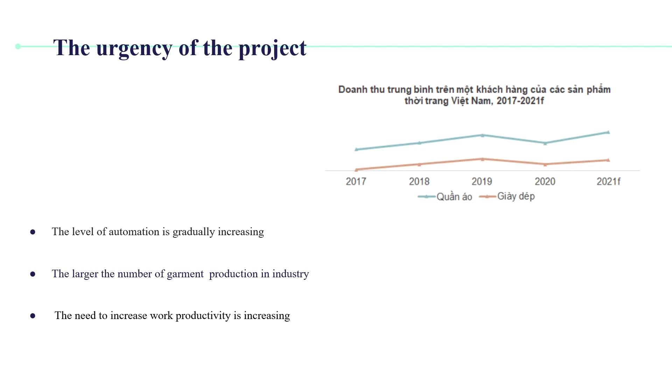Therefore, in order to ship out and sell more products—we'll get to that later—to ship our products, we need to fold them together, right?

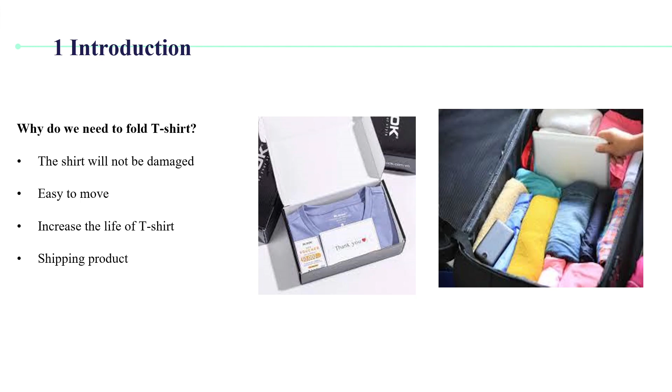That is one of the reasons. Other than that, there are a lot of reasons why you need to fold t-shirts. I don't think my mother told me to fold my clothes for nothing. There's a reason for them, a big reason.

I'm sure you have been seeing these videos a lot. I saw this personally on TikTok first. It was like a life hack, and I think it is fascinating.

You can fold the clothes with just some cardboard and duct tape. It is really useful. Based on this design, based on this principle of folding a t-shirt, we thought to ourselves.

Could we make a machine using this principle? Would it be possible? Do we really need one?

I think that, yeah, we definitely need one because look at the industrial scale. You cannot have like 200 workers just folding clothes. That would be impossible, a waste of manual labor, right?

So you need a t-shirt folding machine, at least for the t-shirt selling industry. That is why we came up with our machine.

You can see here, this is our first pictures. I'm going to talk about it right now, and yes, we are really proud of it.

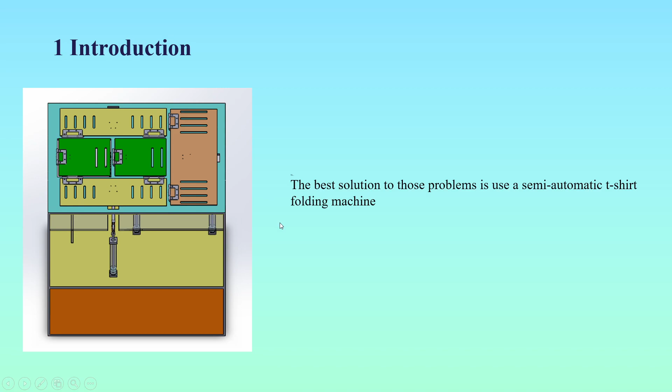Let's talk about the history. Back in the 80s, there have been people, scientists, engineers working on this in Italy.

I'm not going to say their name, I might ruin it. Also, they have not only been able to fold the t-shirt, folding clothes, they have been able to package it too, right? So these things have been developed before the year 2000, before I was born.

So we are not new to this area of research. You could say that we have a lot of, how do we say, former instructors.

Like we have borrowed a lot of ideas from other manufacturers, right?

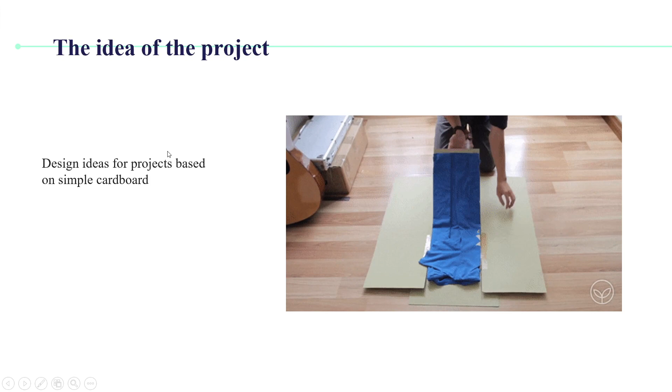So still using these simple cardboard thingy, right? We have designed our own t-shirt folding machine. Okay, this is one of our competitors. I don't think we could say competitor because no way I could beat these guys, right? Yes, but we do beat them in some areas.

Let's talk about this one first. This one is the Mikiyo AT-450, right? This is the one that struck with me the most. I really love this one. It is compact, flexible, and really low on power consumption. The negative aspect of this machine in particular is it is quite slow, and therefore it does not produce enough product in time comparing to the others.

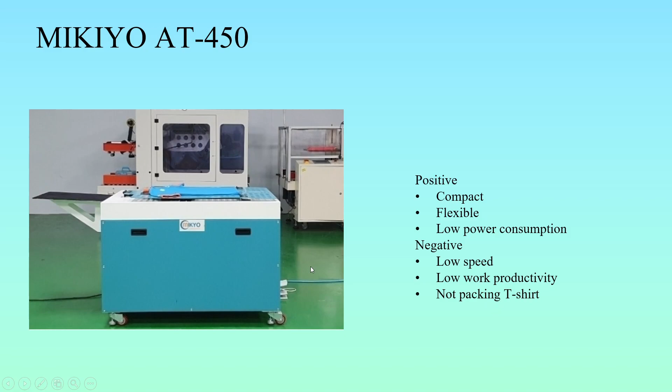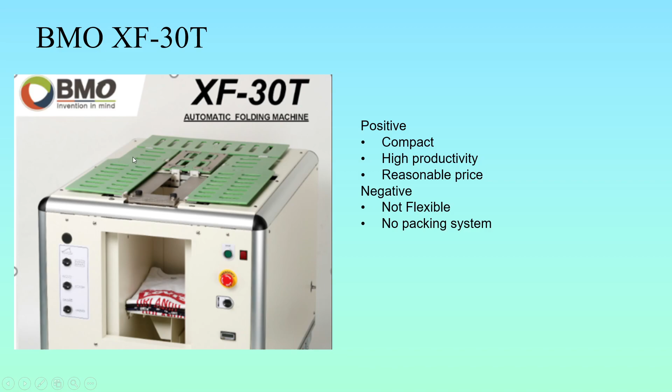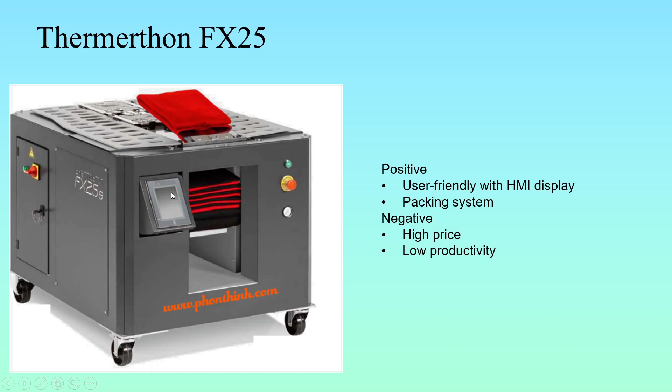Okay, so now we are going to go through the main part of our presentation, the mechanical design. We have borrowed this design, a sort of a table with four sides. We are cutting out these two parts and revealing the motor. Oh no, not the motor, the cylinders and the actuator underneath on how to move these foldable wings.

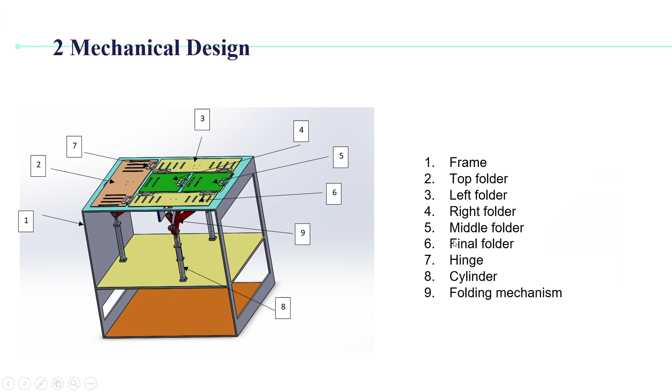Right, so with the 9 parts we have here, we separate them into 3 categories. The frame of the machine, which is just this one. It is really complex because you can see here we cut out a lot of holes so the machine could work without interfering with the frame. Second part is the wings, the main part that is contacting with our products, aka the t-shirt, and the actuator is the driving factor to move our foldable wings.

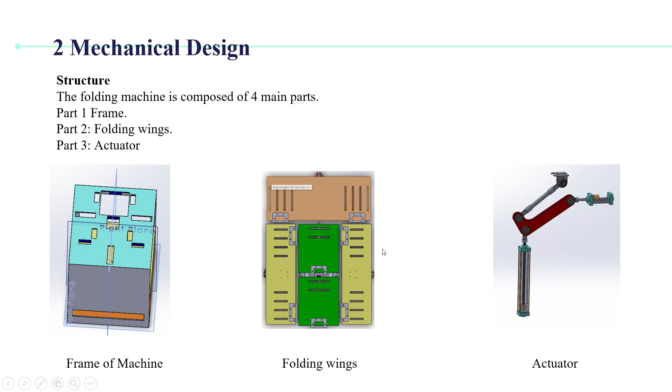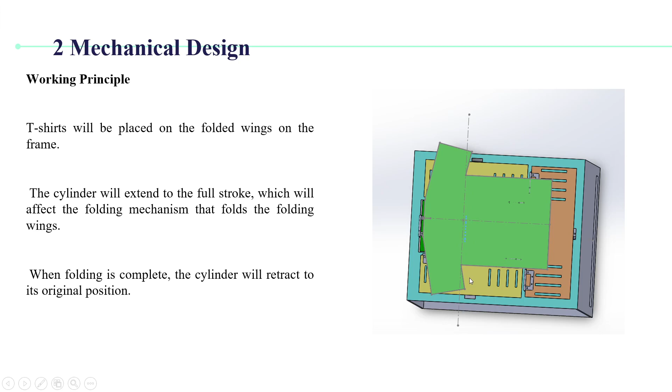Okay, simple, right? So we put on here a demonstration of our t-shirt. As you can see, a worker or anyone, you, me, anyone, will put the t-shirt onto this desktop, and then they would push a button, and this top folder will fold in, the two side folders will fold in, and then the final will fold in, just like this. So easy to understand.

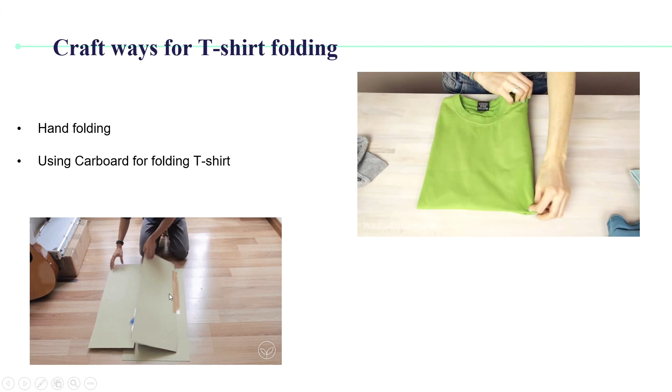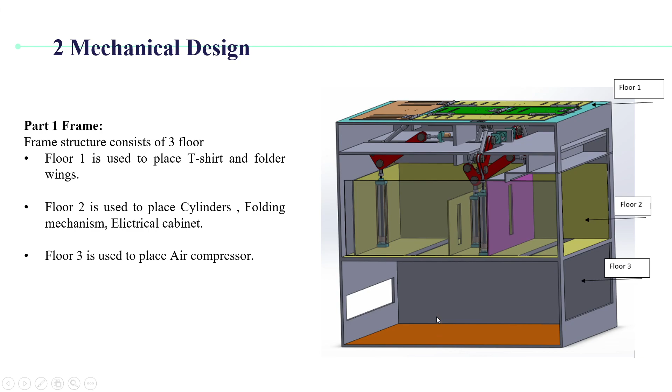So right here we're going to place a, what is that, reservoir, right? And, you know, what is it called, solenoid, to control these pneumatic circuits.

Okay, so let's talk about the folding wings. I have talked about this before. You can see there are 1, 2, 3, 4, 5 folders, of which we designed 3. These two are the same, these two are the same, just placed on the opposite side.

We hold them together using the hinge, which we will talk about later. Now, this is the drawing of our foldable wings. We didn't give the correct dimensions because the machine is meant to be interchangeable. You could replace these folders to fit different types and sizes of t-shirts that you want to fold.

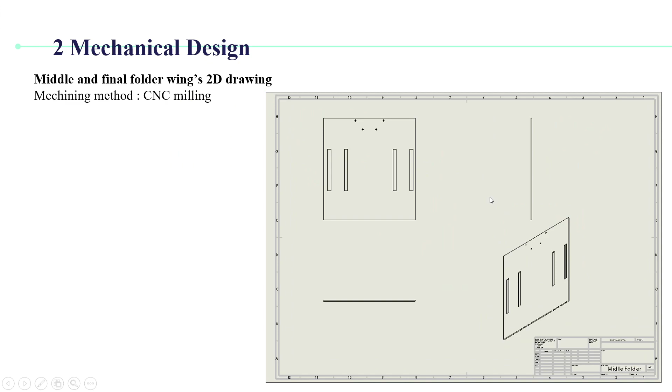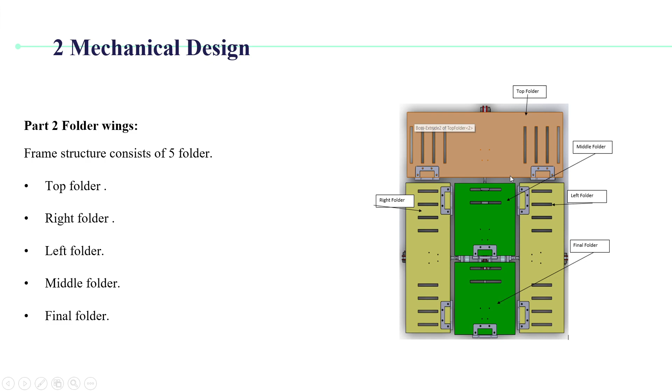Okay, enough about that. Oh, one more thing. The material that we decided to use is plastic, PVC plastic, because it is friendly. It could withstand a lot of forces. Among these plastics, it is also very safe for human contact.

About the hinge, we are using the torsion hinge, which has this design right here. At first we wanted to use the butt hinge, but we ran into some problems because there is a lot of torsion going on when you fold using the actuator that we designed. So we swapped it out using this hinge.

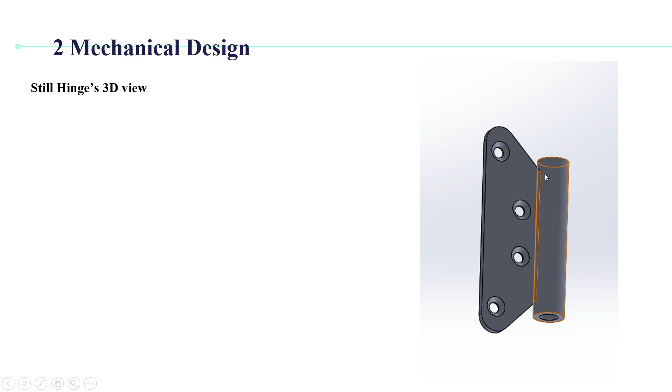There are 3 parts of it. This right here is the moving hinge, the part that will be moving. This is the first part, and this is the drawing for it. This is the still hinge. This part will stick into the frame of the machine and stay there to stabilize the folding mechanism. This is its drawing, and combining it all together, we will have this whole product.

This right here is the shaft holding it, and this right here is the roller — no, not this one, right here.

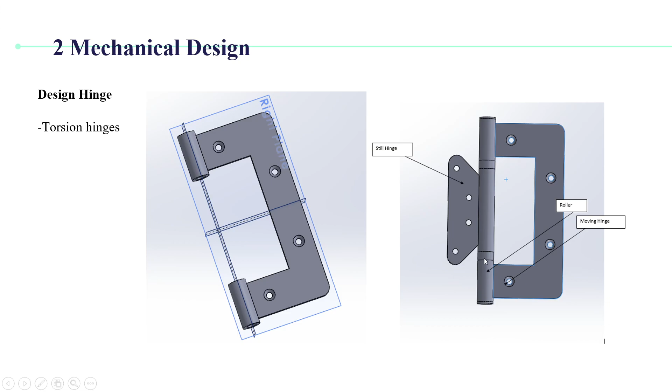So now to our most anticipated part, we go to the actuator. Like if you remember, we've asked a lot about how to transport this motion of moving a cylinder up and down into a turning of the folding movement of the folder.

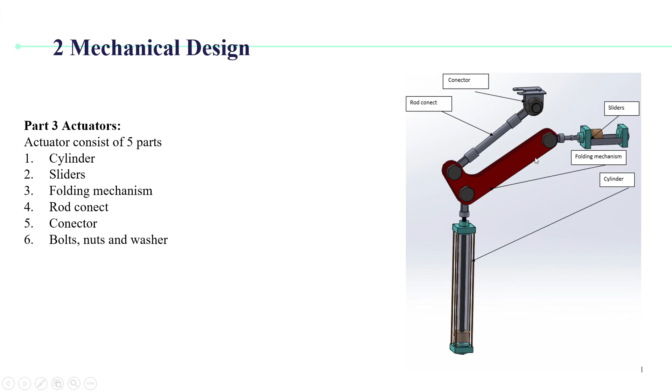So this is our design. This is our cylinder. It will go up and down being controlled by the pneumatics mechanism. And here we have a slider which will move in and out. I'm going to show you this one so it is easier to see.

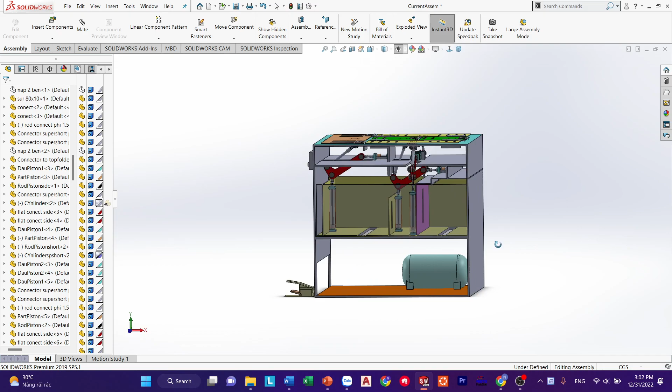Okay, this is our machine. Let's put this away for a moment, and this one too. Okay, you can see this is our finished, kind of finished, product. We have the reservoir here and some buttons, but for now let's hide all of them, revealing just the mechanism. Hide this one too, I'm hiding everything.

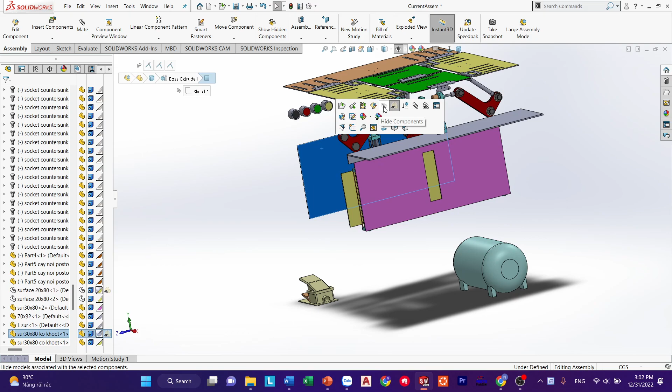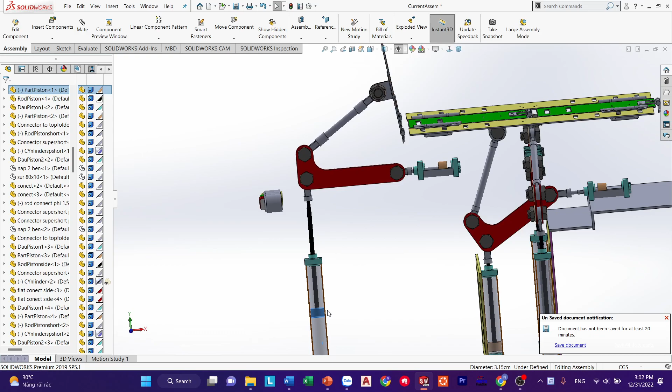Okay, so this is our mechanism and this is how it will move. As we pull this one up, the slider will go inward, allowing this piece of metal to move its head up a corner. As we continue to move it, it will go upward, pushing this folder to fold over from 0 degrees at the start of the cylinder to about 120 degrees.

And it will fold our clothes perfectly if we maintain the speed of 40 meters a second. Oh really? No, 40 centimeters per second. Yes, I'm sorry, that's too quick. 40 centimeters a second is more reasonable.

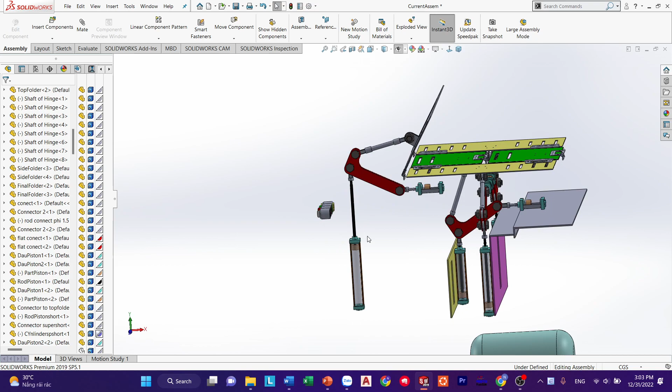It takes about half a second for the cylinder to move up, right? So the rotational speed of this angle is about 240 degrees per second, right?

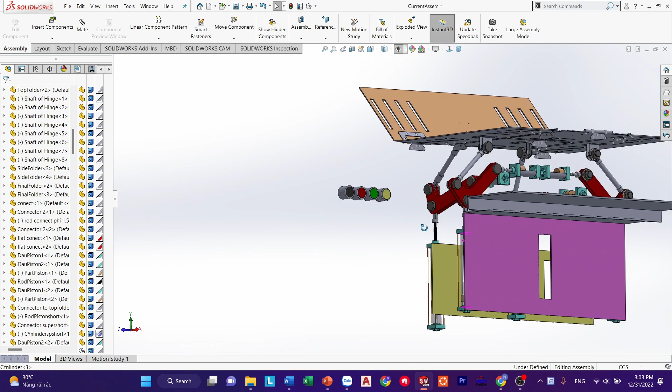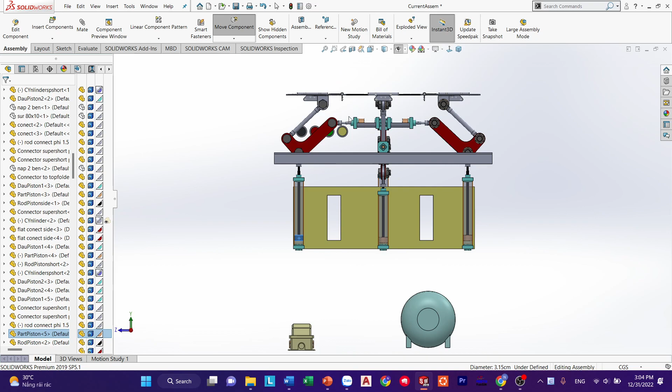And this other mechanism uses the same principle too. Let me show you. Let's actually pull this one down. Now we move this one up. As you can see, the same principle is used here too. Sorry, it's a little bit laggy.

We have more than, like, 700 parts and mates in this SolidWorks file, so it's a little bit laggy. But you can see it's still moving smoothly in our test. This one works too. This one worked very well, just a little bit laggy.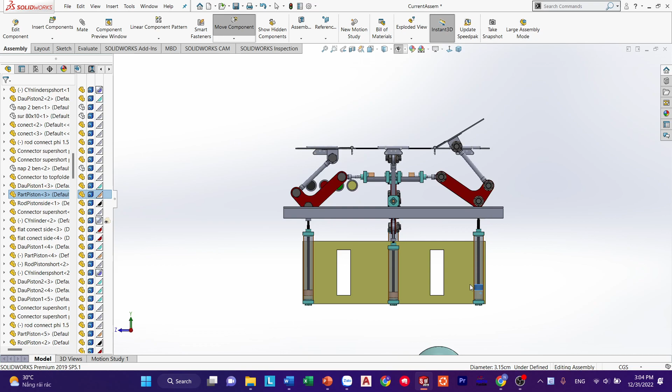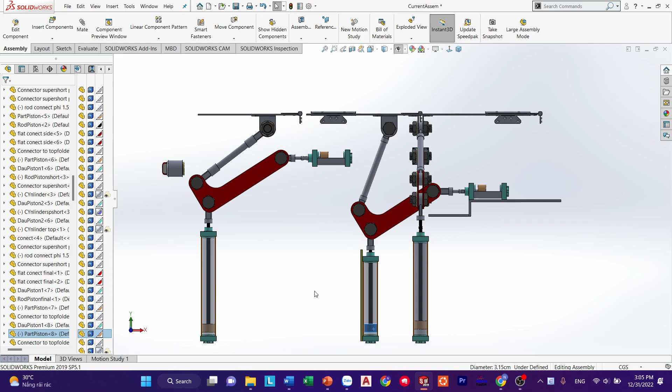Okay, and the final one, this one gives us the most headache. So we actually need to try to find a different angle, but at this stage we are the master of this mechanism, so we managed to put it at a position which will still fold it up like this and pull it down with ease, without interfering with the other mechanisms before it.

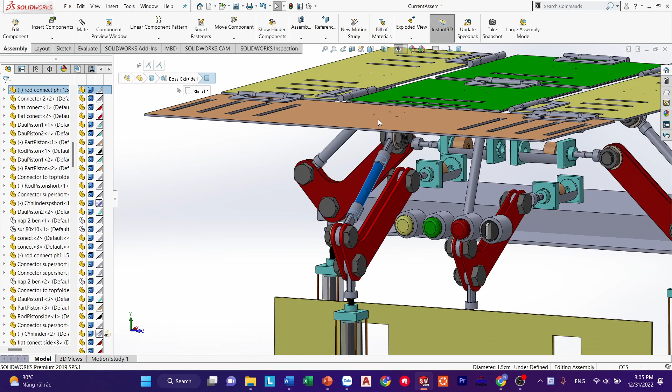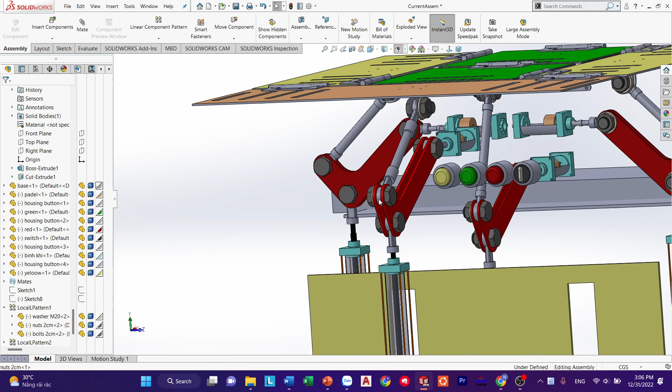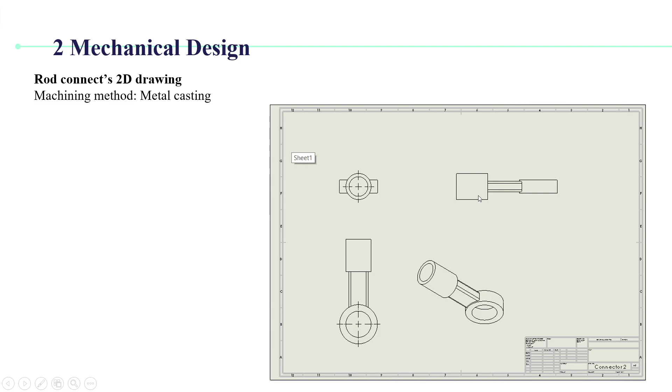Okay, so you can see here we use this design to connect to our folder. Don't have a lot to talk about this. These are just parts needed for the machine to work. Here's just a connector. Right, so we spent a lot of time designing this piece. This piece is actually inspired from the AT450 machines we talked about earlier. It works on the same principle. There are actually two cylinders, but we are only using one cylinder and a slider, which works better, I think.

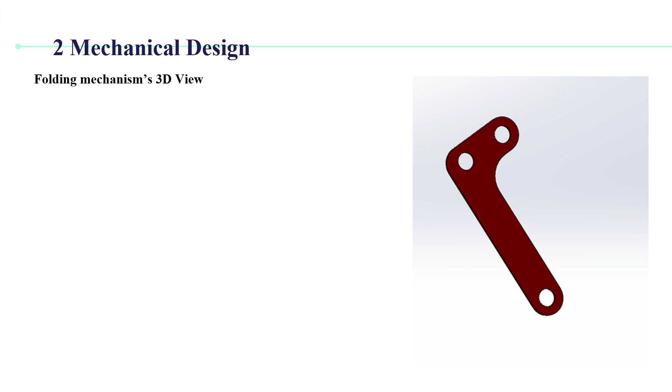And we put in there a lot of other buttons. Like this one, we have the reset button, the start button, the stop, the basics, and the power switch. And our little spices. Okay, we have a pedal right here.

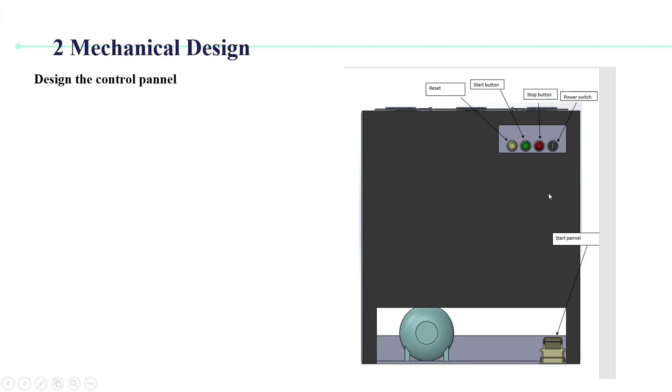Okay, so imagine you are standing at the machine on this side, and you are putting your t-shirts onto the surface. So your hands are busy, right? But your feet are not. So you step on the pedal, and it is basically a second start button, right? So it is more productivity, which is always welcome.

And now to our final part, the conclusion and future developments that we will look into in other projects. The conclusion is our team has successfully calculated the mechanical design and the actuator. We are very proud of our actuator. Yes, the design is pretty much borrowed, but I think the design is pretty much perfected by the former one. The calculation will be put really clearly in the report. The pneumatic design has been working very well, and the drawings and ideas are done pretty well too.

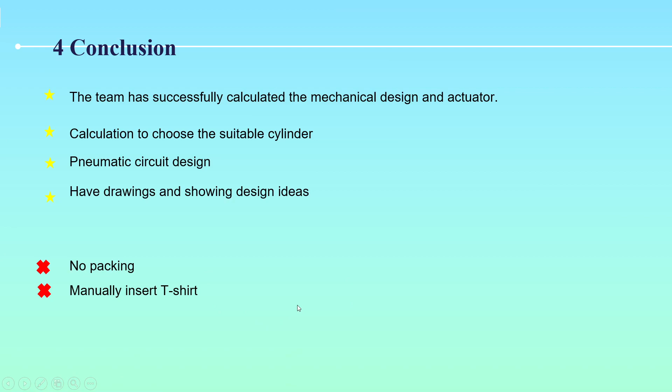Our drawback while doing this project is that we have failed to develop a packaging system. We took advice from our instructors saying that maybe it is best to just take out the final product on top of the desktop. So we might not need it, but we would love to develop it in the future. And yes, we still have to manually insert the t-shirt. There still has to be a worker standing there, putting the shirt on the desktop and then stepping on the pedal, right? So that is not fully automatic. We are at the semi-automatic step.

For future development, we will gradually switch to fully automatic, being able to just throw in the shirt, really wrinkled, and then get out a product without a flaw. Using IoT to control the model remotely. IoT has been booming lately. Most of the projects that I look into use IoT because it is amazing for developing your products. We are going to add more functions like ironing or packaging. We are going to use sensors to count the number of products, or use machine vision to check the forms, check if there's any errors in the process, and then be able to control it, right?